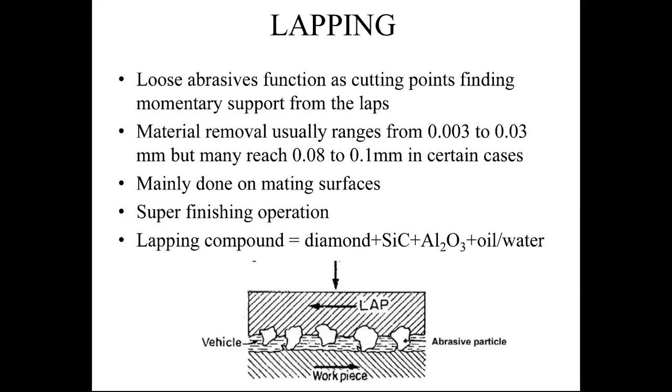So that's why we're not using it for soft material. Normally lapping is used for hard material like cast iron, tungsten, these kinds of material. So a very fine limit of material is removed, taken to a finer limit. So this will produce a polished surface, such as with a polishing cloth, right?

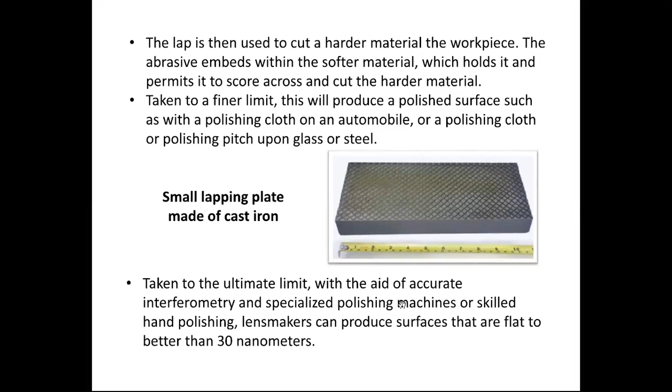A very smooth surface you're going to get, especially for harder material, not for softer material. So it is taken to the ultimate limit with the aid of an accurate interferometer. The interferometer is one equipment which is used to measure the surface roughness; maybe we can discuss that in metrology in your next chapter. So if you measure, the surface roughness is very small in this. So a very smooth surface you're going to get by using this process, lapping.

So in lapping, we have hand lapping as well as machine lapping. I hope we discussed this in the last class. So hand lapping is nothing but whatever I explained to you. You sprinkle the abrasive particles and just rub the lapping tool. We are using it with the hand, that's why we call it hand lapping.

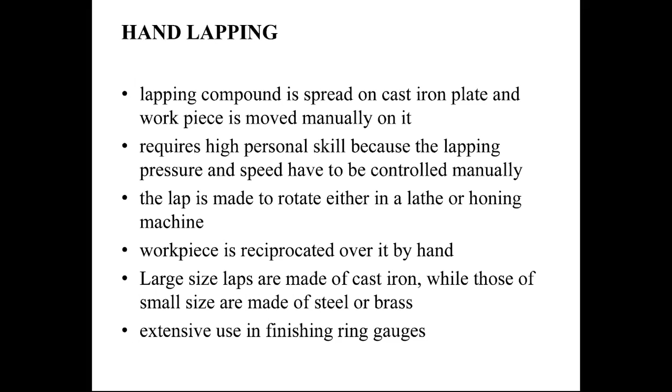In addition to hand lapping, if you want to speed up the process, and wherever very strong material is there, the manual force sometimes is not sufficient. So machine force is required, as well as we need to speed up the process. So for that we need to go for machine lapping. Manual lapping and machine lapping are the same; only in manual lapping you're doing it manually.

That's why your speed is less. Here you're doing it with a machine, so the speed is faster. Because of the faster speed, your process will be faster. Whatever you do in 1 hour with manual lapping will complete within 1 minute. So that much accuracy, that much fastness is coming.

When we are doing it for industrial purposes, we need to manufacture components very fast, right? In 1 day, in 1 hour, we need to manufacture a lot of components. So normally in industries they use machine lapping. In machine lapping, you have a rotating table on which you place the plate.

On this rotating table you keep your workpiece, and you have a top portion as well as a bottom portion. The top portion is the lapping tool. In most cases the workpiece is stationary, and the lower lap as well as the upper lap rotate about their axis. Then there is relative motion between the lapping tool and your workpiece, and because of this relative motion it applies some force and removes material.

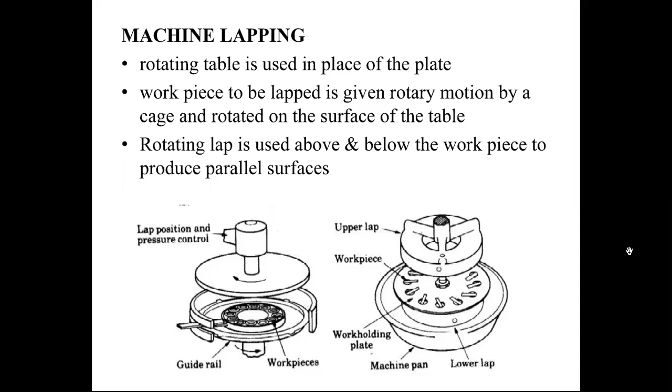Sometimes your workpiece rotates in the opposite direction to the movement of the lap. In that case the relative motion increases further, so your machining rate increases. Wherever we require very fast machining, we have rotational motion for both the lapping tool and the workpiece, rotating in opposite directions. So this is the typical machine lapping, which I also showed you last class.

Normally in machine lapping it is not possible to continuously feed abrasive particles. So in that case we make the abrasive in the form of a slurry, mixing it with some dense liquids. This semi-solid consists of abrasive particles, and I can call it an abrasive stream. This abrasive stream is allowed to pass between the abrasive tool and the workpiece.

You see here a wheel rotating, and these are the workpieces. When the stream passes in between, your workpiece is machined very smoothly and very fast, and in less time you complete your object. So this is a typical machine lapping. One more thing: normally we use this for bigger components.

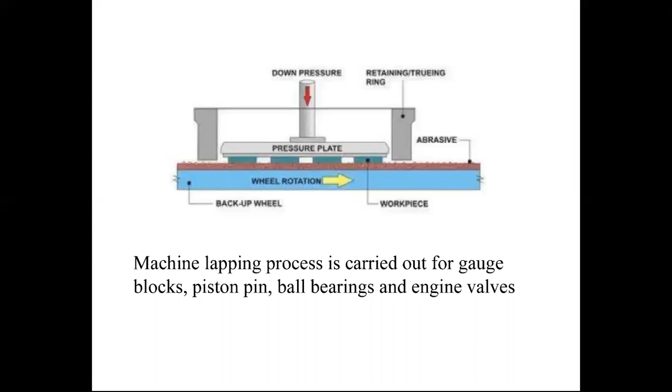The same kind of equipment setup is in the lab. It looks like this. It's very small, like your polishing machine I told you about last class. So this is nothing but just like your polishing machine. This is the small lapping machine. These are the holders. In that you can keep your workpiece and you can run this.

When you're running it, whatever lapping tools are inside are rotating and remove the surface layer. So lapping can be used to obtain a specific surface roughness. Normally when two mating components are there, especially slip gauges or any measuring equipment, the contacting surfaces have to be very smooth. That kind of smoothness is obtained by this kind of machining process. Mostly lapping is used for hard material. Remember, not for soft material.

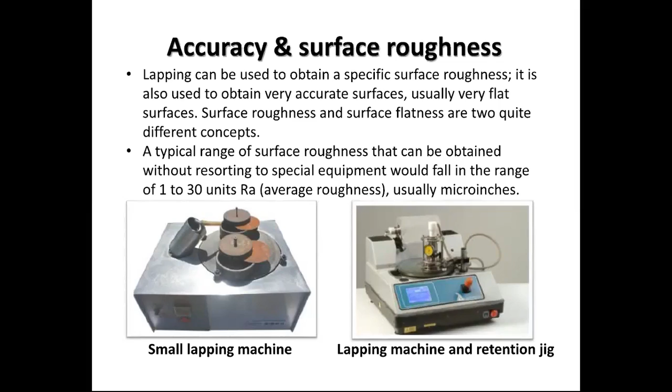In the honing tool, normally we are not sprinkling abrasive particles; abrasive particles are embedded into it. Like in your bread, maybe some sweetness is embedded into the bread. Similarly, here in a metallic stick, your abrasive particles are embedded. This embedment is similar to your grinding wheel.

A grinding wheel is circular, but honing tools are like rectangular sticks. That's why they are called honing sticks or honing stones. If it is heavy, we call it a stone. If it is thin in size, we call it honing sticks. These honing sticks are mounted on a tool. You can call it a honing machine or honing tool. On this, the honing sticks are mounted, and it rotates about its axis.

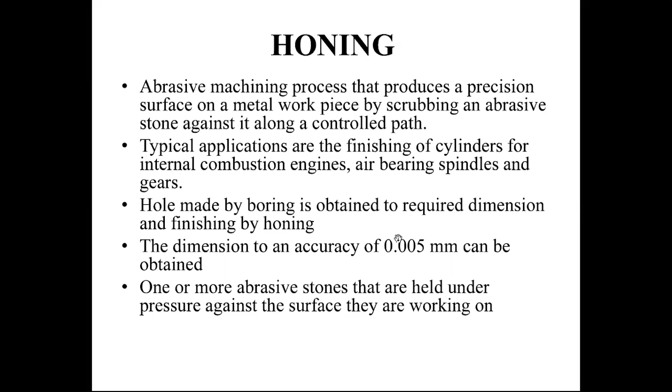Once the hole is prepared by the boring machine, the honing tool is inserted into that hole, and the honing tool rotates about its axis. The workpiece is stationary and the tool is rotating. So whatever unwanted projections are there on the surface are removed.

Normally 6 to 8 honing sticks are connected on the periphery of the honing tool. The sticks are held together and metal is removed by rotating and reciprocating. If the hole is very small in depth, only rotation is sufficient.

But if the hole length is very long, the stick length is not sufficient to cover the entire length. Then you need to rotate as well as reciprocate the tool, forward and backward in this direction, as well as rotate about its axis.

For the lapping process, we normally use dry, but in special cases we use wet lapping. But honing is normally wet only. The honing tool normally uses a wet cutting process, so some kind of coolant or lubricant is required.

Those lubricant particles carry out whatever material removal is happening, the very small chips coming out from the workpiece. Those chips have to be removed. That's why honing normally happens with a wet cutting process.

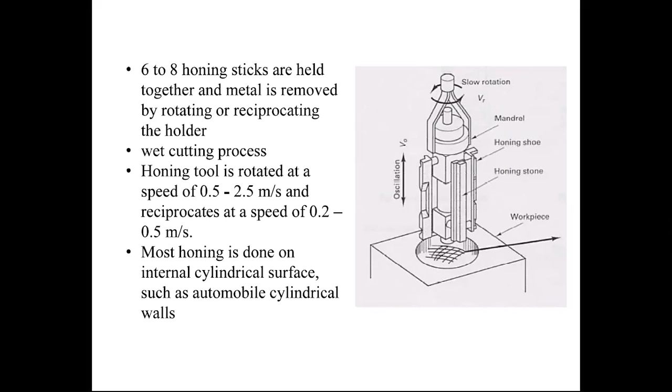Normally for flat surfaces or external surfaces we use lapping, and for this we use the honing process. That's a typical application. You can see this is also a typical honing tool. In this, you can see this is the holder, and this attachment is there.

To this, you stick the honing sticks or honing stones, and this is inserted into a chuck. When this setup rotates, whatever honing sticks are there also rotate.

When it is rotating inside a circular object, whatever surface comes in contact with these sticks, that circular surface gets removed. The maximum thickness of the layer that can be removed is less than 0.05 mm, which is nothing but 50 microns.

Typical applications of this finishing include cylindrical internal combustion engine cylinders, air bearing spindles and gears. Wherever gas tight or gas proof joints are required, normally they use this honing operation. There are many types of honing, but all consist of one or more abrasive stones held under pressure against the surface they are working on.

So in that, there is a spring force. These sticks are nothing but stones, honing stones, and they are pressed against the internal surfaces, the internal holes of a particular workpiece. Normally honing is used for internal surfaces. In that internal surface, you need to hold it, so this tool has to be kept inside the hole and it is rotating.

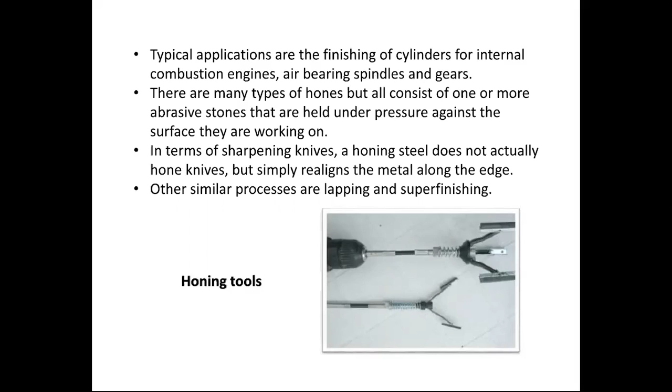Honing stones are made from common abrasive and bonding material. This honing stone is a little different from a lapping stone. The lapping tool is a hard metal rectangular piece with some kind of circular roughness in it, but the honing tool is just similar to a grinding wheel.

Some kind of bonding material is required, which holds the abrasive particles in the form of a rectangle. So honing stones are rectangular, similar to grinding wheels, except grinding wheels are circular while honing tools are rectangular bars, or you can call them sticks, made from common abrasive and bonding material.

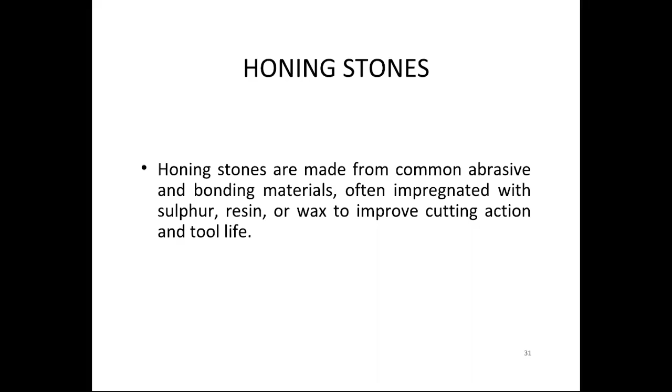They are often impregnated with sulfur, resin or wax to improve the cutting action and tool life. Normally in the bonding agent they use sulfur, mixed with sulfur, and also resin or wax. Normally polythene plastic resins are also used to hold these abrasive particles. By providing sulfur and other abrasive mediums, they increase the cutting action of these honing tools.

The abrasive particle must withstand the cutting pressure for metal removal. In the previous case of lapping, you had free abrasive particles that could run out from their position when worn out. But here, these abrasive particles are embedded into a metallic object, so they must withstand very high cutting pressure when cutting the material.

The bond must be strong enough to hold the grit. Whatever bonding we use, whether sulfur medium, wax or resin, it must have sufficient strength to prevent the abrasive particles from wearing out frequently, but not so hard as to rub the bore and retard the cutting.

It's normally because we are using some kind of resins, so these honing sticks are not as strong as the previous lapping tools.

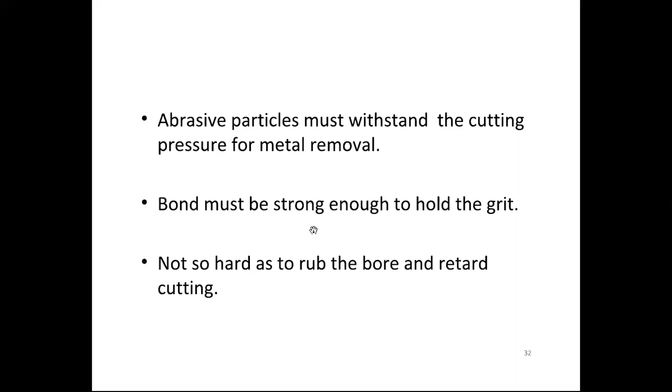This process simultaneously rotates and reciprocates. As I showed you in the previous graph, this used to have a rotational as well as a reciprocating motion.

So maybe just give me some time.

Simultaneously rotating and reciprocating motion is there, whereas previously it's only reciprocating and only rubbing action. The surface produced will have a characteristic cross-hatch lay pattern because you have very fine abrasive particles. If you observe microscopically, you can find some kind of star pattern on the surface, and the thickness of this pattern is less than one micron.

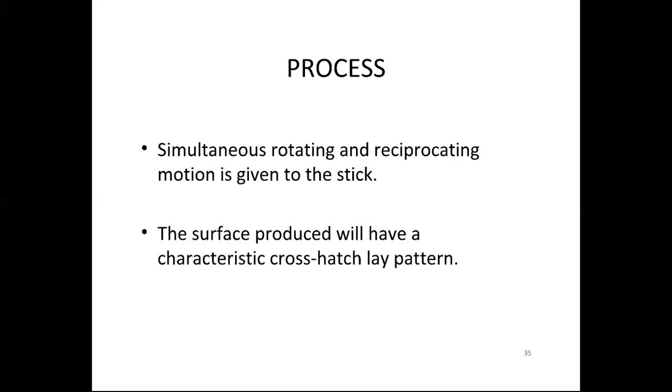So normally with your naked eye, maybe you cannot see it, you can only see a very smooth surface. You cannot even feel it with your finger because it's very minute, less than a micron. That's why you cannot see it, but if you observe under a microscope, you can see some kind of hatching on it.

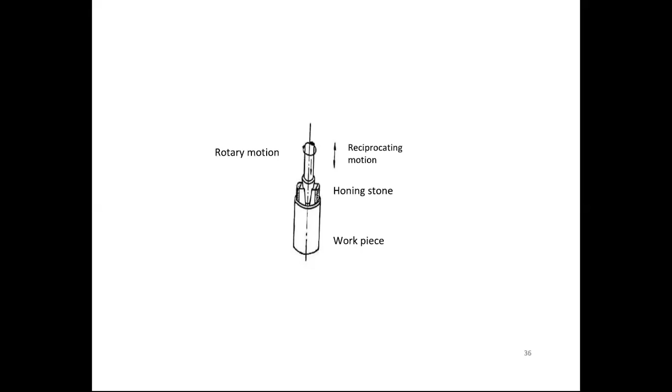When it is rotating about its axis, with both rotating and reciprocating motion, the sharp edges come in contact with the surface of the workpiece and remove material from it. A very small amount of material, maybe one micron to 3 micron, or maximum 10 micron thickness, can be removed by this action. Because the surface is very smooth, you get very good surface roughness and very good surface finish.

So the third operation is broaching. It's a very simple operation. Even though it is a super finishing operation, it is not only for super finishing - even for basic machining we can use broaching.

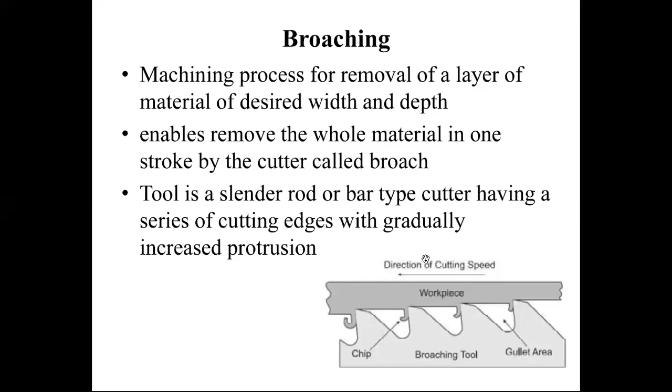So this is a typical broaching tool. A broaching tool is typically a cylindrical or slender type of object.

In that tool, you can see some projections. In the initial projections, the depth of cut is higher, and as it goes further, the depth of cut decreases. You can see the diameter of the tool is gradually increasing towards the end. This is the starting point and this is the ending.

You need to keep the broach tool in the hole. Normally it's used for internal holes, and sometimes for external surfaces also. You keep the broach tool here, and when you push it through, the tool gradually increases in diameter. It's essentially a slender taper tool. When you push it, initially the depth of cut is more, but the size of the cutting teeth is smaller.

So the material removal rate in the initial teeth is more, but as the teeth size increases going forward, the first stroke removes more material. In the second stroke, the second tooth removes much smaller material compared to the first. Like this, as it goes toward the end, a very small amount of material is removed.

Towards the end of the tool, at the end teeth, a very small amount of material, maybe in microns, is removed. That is almost the same as your lapping or honing process. So in a single stroke, you can finish as well as super-finish. You can remove material up to the required dimension and also perform super-finishing operations, all in broaching.

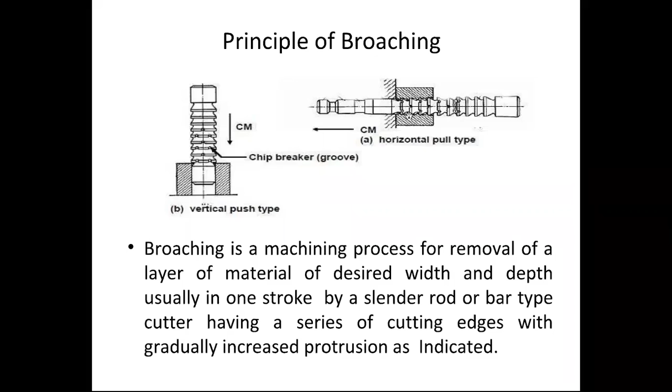Because of this gradually increasing diameter, as the tool moves forward, each tooth comes into contact with the surface previously cut by the earlier tooth, and this later tooth removes material of lesser thickness than the previous tooth. So as it moves forward, each successive tooth removes less material than the one before, and at the end, a super-finishing operation effectively happens.

This process is called broaching. Normally broaching is used for internal holes as well as external holes.

The workpiece is usually clamped on a fixture. For internal holes, the broach passes through the internal hole, and for external work, it's normally used to cut keyways and any kind of races. We normally use these kinds of broaches for those purposes.

For splines, you know these kinds of things with projections, we normally use these kinds of broaching tools. Using broaching tools, finishing of splines is very fast.

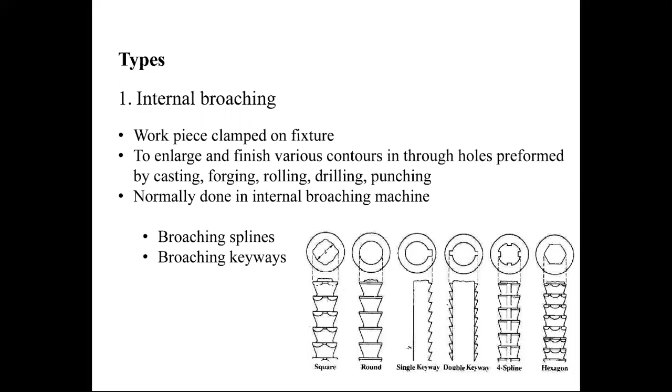So that was for internal. Normally this is for internal, and for external, you normally use this kind of broaching tool.

Broaching tools have teeth of different dimensions, as you can see here. As the workpiece moves, or as the tool moves relative to the workpiece, whichever tooth comes into contact with the workpiece removes material accordingly.

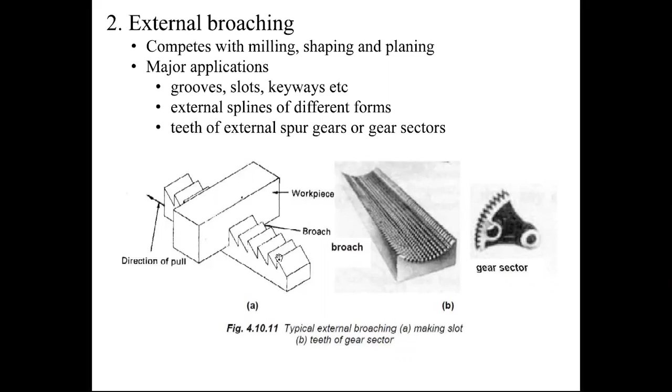So as the front height of the teeth is smaller than the later height, that's why until the end you need to remove the material. So in the starting, you have more removal of material. In the end, your removal of material is less. That's why the end process is considered a super finishing process.

So broaching machines are generally specified by different kinds of specifications. And coming to broaching, the only basic difference in broaching is it is completed in a single operation. So broaching is not like our shaper or slotter or milling, where repeatedly we need to remove the material continuously. It's not like that. With one stroke, the operation will complete.

So maybe if you go to the previous slide. In this slide, if you see, this is a workpiece, whether internal or external. So you keep your workpiece on this tool, and when this cutting tool is moving, passing through this hole, initially you have cutting, then moderate cutting is taking place, and at the end of the teeth, your finishing operation is taking place. When this tool is moving from this location to this location, your machining is done.

So this is a very fast process, and because of the fast process, within one stroke your process is completed. Normally we are not removing very thick material. The thickness of material removed is less, but compared with honing or lapping, the thickness of this material is comparatively higher.

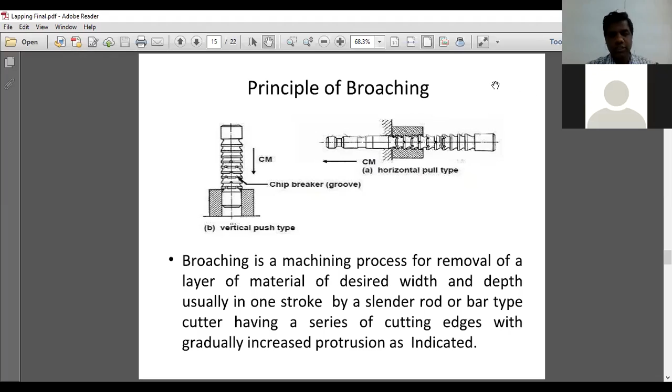So this broaching tool you see is similar to your hacksaw, whatever hacksaw you use in carpentry. In a hacksaw, we reciprocate continuously. To cut the workpiece, we reciprocate the hacksaw front and back a number of times. Only then are you going to remove the material. But here it is not like that. Only once you move, in one forward stroke, your machining is completed.

Remember, it is similar to your saw, but a saw has a very thin blade, while here you have a very thick surface, a large area. So this surface area is removing the material. Normally these kinds of tools are used for internal circular surfaces, and this one is used for flat surfaces. Broaching machines are generally specified by type, whether horizontal broaching or vertical broaching, depending on whether pushing or pulling is happening.

So just give me 1 minute. I'm getting one more call. Something important. Call is disconnected. Okay, okay.

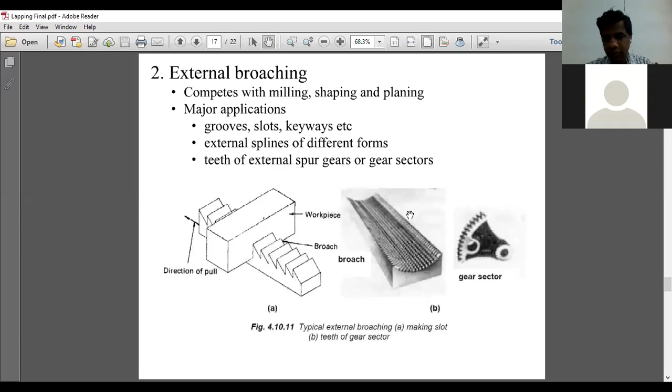So how to specify this broaching machine? A broaching machine is normally specified by its direction of broaching. If you go back to the previous slide, this can move horizontally as well as in the vertical direction. So depending upon that, you can specify the broaching machine as horizontal or vertical, and similarly by stroke length, meaning how long a stroke there is in the machine.

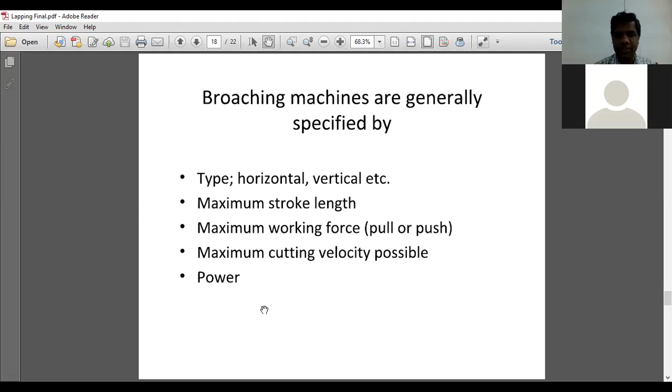Stroke length and maximum working force: because here the cutting is completed within one stroke, you need to apply comparatively higher force than in lapping and honing. So how much force you are applying, pulling or pushing, in which direction and how much. Then maximum cutting velocity, meaning how fast you are moving your broach, and also power rating, how much capacity of motor is connected to this broaching machine. These are a few specifications for broaching machines.

So wherever you want a high production rate, there normally we use broaching. In broaching, cutting like your shaper or slotter, or maybe drilling, and also enlarging the hole like tapering or boring, whatever you're doing, as well as the super finishing operation. All these three processes are performed simultaneously.

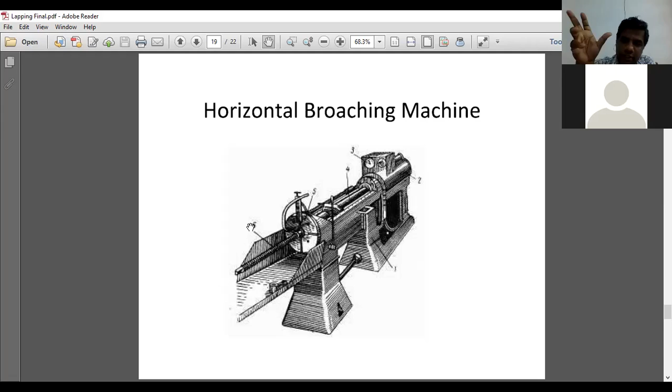That's why this process is considered a single stroke process, and because of the later teeth, it is used for super finishing also. That's why this process is considered one of the super finishing operations too. But this process is a little different from the previous two super finishing processes.

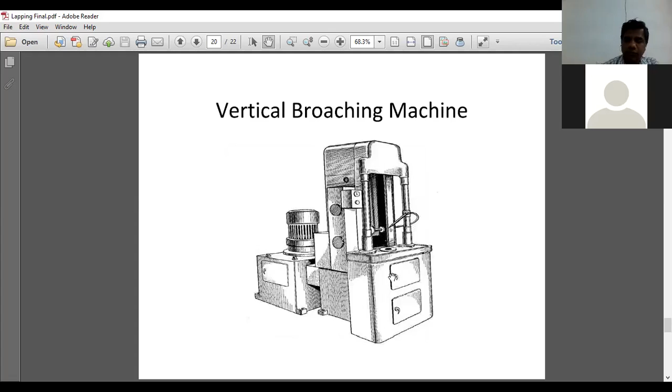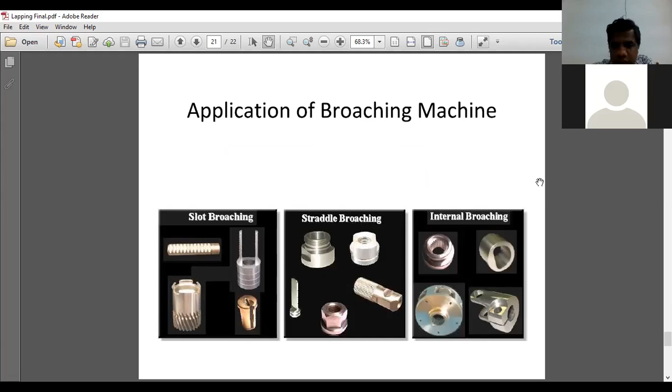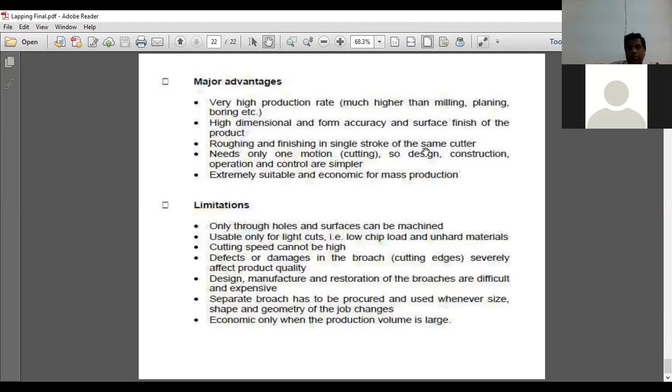In the exam, advantages may also be asked. So, advantages and limitations of broaching. It has a very high production rate. As I told you, within a single stroke it completes its cutting process. That's why the production rate is much higher than any process you studied till now, whether milling, planing, turning, boring, or even honing. Among all the processes, this has the highest production rate, and also high dimensional accuracy, because it is also a super finishing process.

Your teeth are also provided for that. It has high dimensional and form accuracy and surface finish compared with other conventional machining like milling, turning, drilling, but the accuracy is less than the previous two super finishing operations, honing and lapping. Roughing and finishing happen in a single stroke of the same cutter. That's why your production rate increases. Within the same stroke, the initial teeth make rough cuts, then medium cuts, and later finishing cuts. So it needs only one motion.

So design, construction, operation, and control are simple. Moving in only one direction, your complete cutting process is done. So it is extremely suitable and economical for mass production. Obviously, your production rate is very high, since within a single operation you complete all the cutting. Because the production rate is higher, these kinds of processes best suit mass production.

Now limitations. Every process, when it has advantages, also has some disadvantages and limitations. Normally only through holes and surfaces can be machined. If blind holes or partial holes, it's not possible. Only through holes and flat surfaces can be machined by this. It is usable only for light cuts.

Normally broaching is not used for heavy cuts like we do in turning or milling. There we have very strong cutting tools, so a very high thickness of material can be removed and very heavy cuts are possible. But here cuts are very light, and the material removal rate compared with milling and turning is less. Cutting speed cannot be higher because it is completed in a single stroke.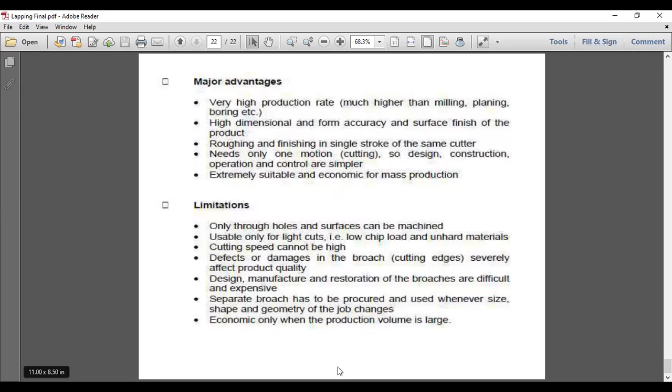So any questions? If there are no questions, what we'll do, because it's my usual practice, we need to go for some questions. So your previous years' questions we can see. Yeah, some previous year questions maybe we can see from these topics, grinding and the other three.

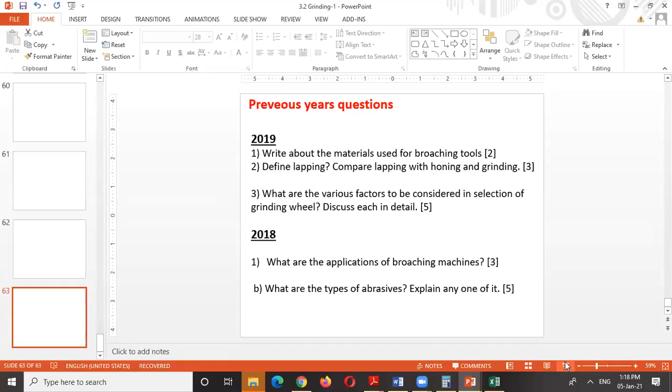So these questions are from 2019. I've taken a few questions from 2019 and a few questions from 2018, from these topics. Milling, already after milling I discussed the previous years' questions, so that's why I'm not taking milling here. So I'm taking grinding and these super finishing operations. So you see, last year, 2019 December.

So the question is about the material used for broaching tools. Which kind of material are you using for broaching tools? Normally broaching is nothing but a tool, a cutting tool. So whatever material we're using for the cutting tool, that answer has to be written here. Normally for cutting tools we're using high speed steel, high carbon steel, right? Ceramics tools are also used. Normally high carbon steel or high speed steel is used for broaching material.